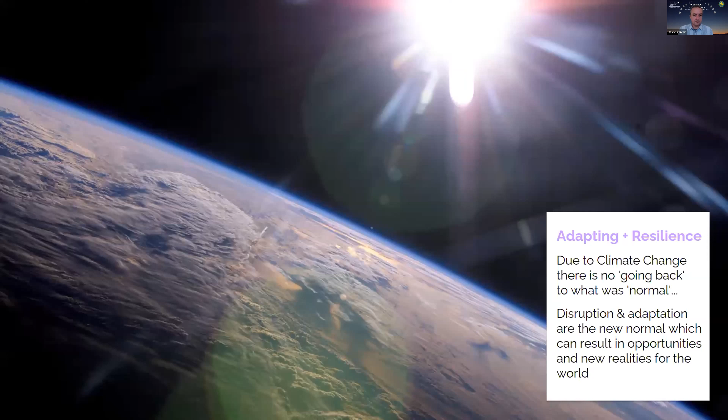So we often use the terms adaptation and resiliency when we're talking about this sort of world we live in now that's faced with a variety of climate crises and global warming. The terms resiliency and adaptability are used to describe that effort of survival that humans are engaged in, as we face an ever increasing number of regularly occurring crises and stresses that in large part have been intensified by climate change and global warming.

When we talk about designing for resilience, the challenge is very much connected to the physical world around us. Where we build our communities is right at that sensitive connection between the built environment, which we create and shape, and the natural environment, which operates at scales much larger and more powerful than we can easily and safely control. It's this tension between the built and natural environment that exposes humans to many of the dangers we face, and unfortunately a lot of them are catastrophic and result in loss of life.

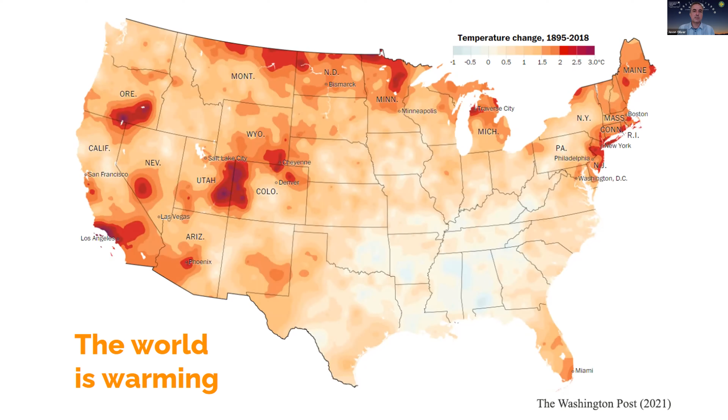This is interesting science telling us the world is warming up. But how does that affect us on a local scale? What do we do about it? One thing we focus on in building design and city design is known as the heat island effect, which in many ways causes these temperature extremes in specific areas.

Global warming directly and physically affects the built environment through the heat island effect, where cities with materials that absorb solar radiation, rather than reflecting it back into the atmosphere as the land ordinarily would, end up concentrating that heat, increasing the temperature of these areas. That's why sometimes in downtown Los Angeles it may be 10, 15, 20 degrees warmer than other parts of the city - a direct result of the heat island effect.

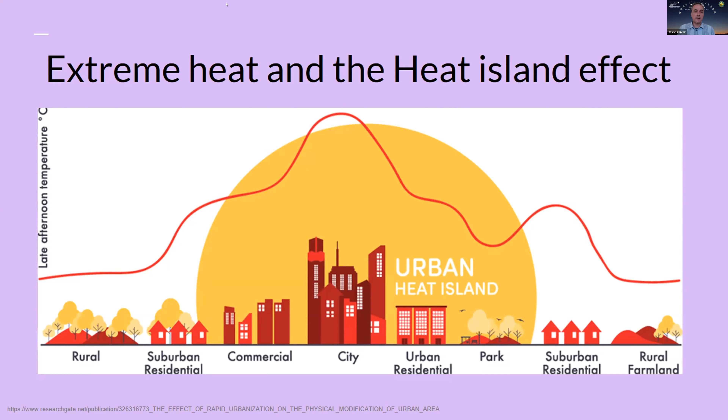The reason that surface gets hot is because as it's being bombarded by solar radiation throughout the day, the black surface, this dense material of asphaltic concrete, absorbs that heat and then re-radiates it out through conduction and convection, rather than the radiation simply bouncing back into space. So that's a really obvious example of the heat island effect on a small scale.

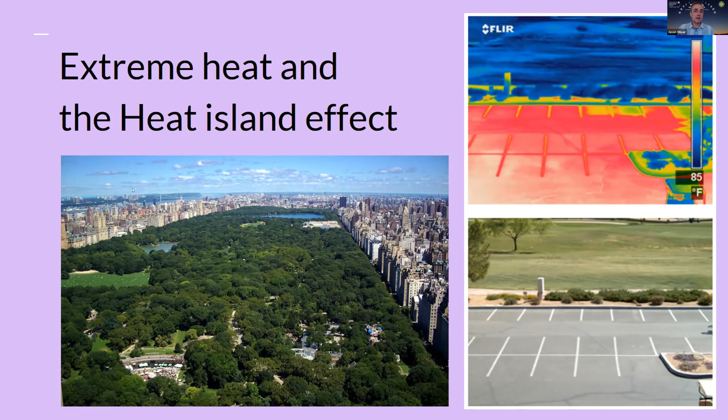So what can we do? Well, we have the ability to plant trees, and that seems pretty obvious, but the idea of urban forestry is a very important, conscious movement taking place in cities to provide more protection from solar radiation. We found that reducing the heat island effect through shading, often provided by trees, provides a whole host of benefits.

So obviously people say, well, why don't we just plant more trees? But it's obviously more complicated than that. We can plant trees, but in order for them to become mature to the level they are in communities like Brentwood and Beverly Hills, that takes many decades. And it takes not only time, but also the people in those communities or the government, the municipal agencies overseeing the design and maintenance of the street and median strips. They've got to water those trees and care for them. That's a long-term commitment that unfortunately some communities have the resources to provide and others don't. We can see that visually when we look at these communities.

Unfortunately, what we often see in a lot of communities—this being an abstract representation of a typical house we might see here in Southern California—you can see the deficiencies when we start talking about things like solar exposure. Many houses have a roof, but that roof really doesn't do a lot to protect the building significantly from solar radiation.

Often we want to stop the solar rays before they even get a chance to hit the house. A lot of these buildings, because of economic reasons or the momentum of the building design industry, tend to look a certain way because that's what people are used to, that's what they want to buy. There's a predictability to a housing developer building tracts of housing like this, but they don't really do much from a sustainable design standpoint. They don't protect the building from summer heat, and they don't do much to combat extreme heat days.

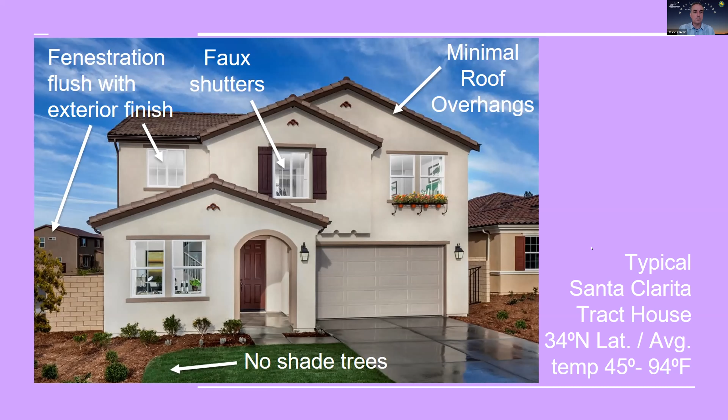So there are a lot of simple architectural things we can do to modify the shell of the building, the envelope of the building, to start increasing the performance of these projects. We could simply plant trees in front of houses, and I think that would go a long way to improving the performance of our buildings.

But obviously we've got to know where the sun's going to be traveling in order to know where to put the trees, not just randomly placing them. We've got to be strategic about where we place them, and make sure we use the right species—either indigenous or native to the area—so they're used to the weather patterns and the access to water, versus other trees that use up a lot of water, which is a critical issue for our climate.

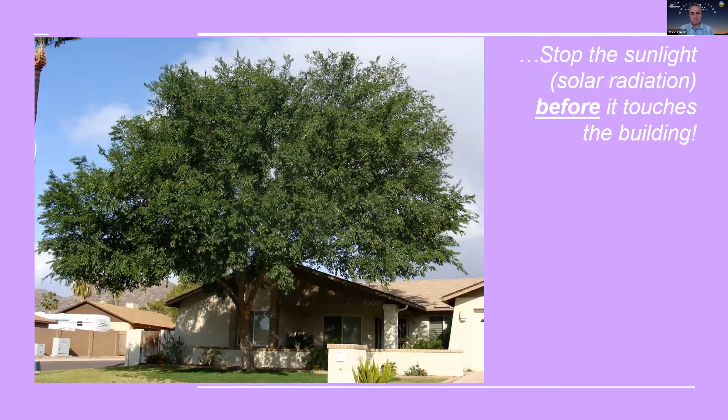One of the areas of the world that I like to look at for inspiration is down in Australia. They have a really aggressive sustainable design program in both residential and commercial buildings.

I also like the fact that this type of architecture creates what we call layered spaces. We often think of our house, or whatever building we live in—maybe an apartment, condo, or single family residence—and then there's a landscape area or yard that's a separate thing. But we're seeing a lot of blurring between those indoor and outdoor spaces.

Again, these spaces can be positioned to take into account the path of the sun, so we can provide more shading for people when they're in those outdoor areas. We can also use these spaces as safe zones for children, where they can spend more time outdoors, maybe outside the house but in a safer environment, providing what we call defensible space that you can monitor.

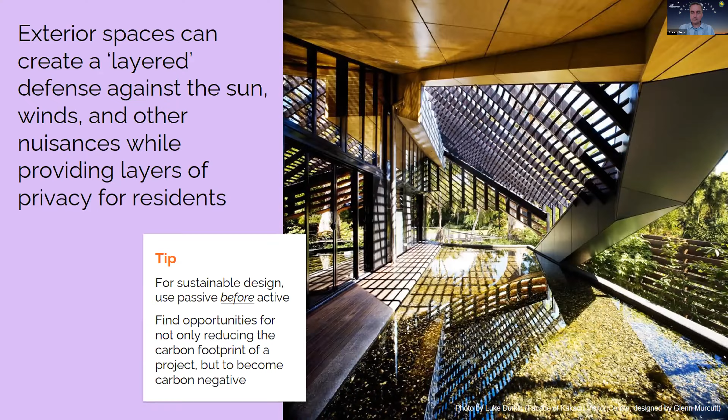Another important topic in sustainable design that affects everybody occupying the inside of the building is biophilia—this connection and balance we have, or should have, between the natural and built environments. We kind of got away from the idea of nature being part of our everyday lives, because it's difficult to control in the way we can control things using artificial air conditioning or sterile environments that don't have plants and animals in them.

But there's a lot that's lost by not having this connection to nature. And so biophilia is the movement to really help reintegrate nature into our daily lives.

I think over the last 18 months or 2 years, particularly as the pandemic's been here, we've begun to realize how vulnerable we've become because we live in these sort of sterile environments. Some of the studies done relative to COVID have found that communities where people were in much closer connection to nature on a regular basis, maybe they were in agricultural communities or whatnot, often had a resiliency that didn't exist for people that lived in more sterile environments.

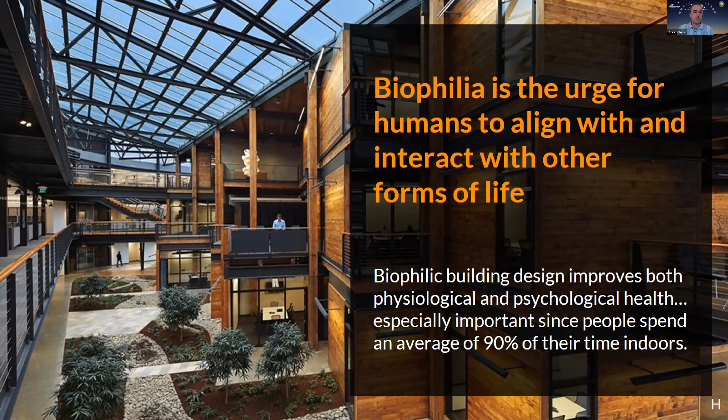Anytime that we can blend together the natural biome, the natural plant and animal life of a community, even if it's in an urban context, that's something that's going to benefit people. And of course, we have to understand what is the animal and plant life that exists in that area, or did exist, or would thrive there, so we can be informed about what types of plants we should incorporate into our architecture and city design.

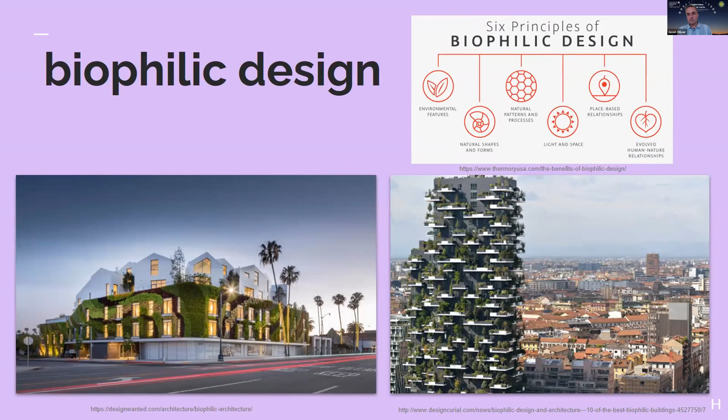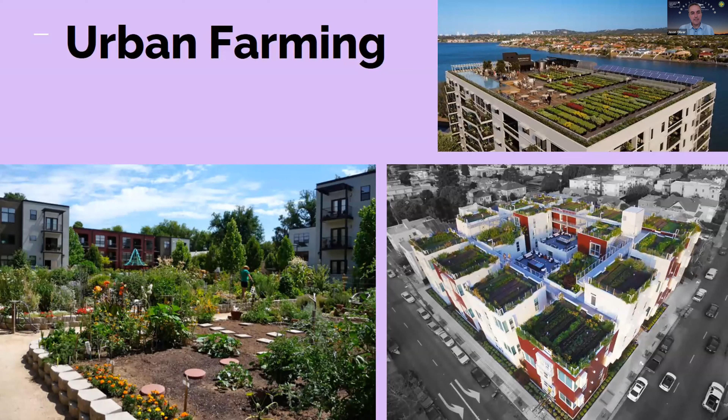Urban farming is another interesting one, and it kind of goes hand in hand with the idea of biophilia. Obviously we plant vegetation for decorative reasons on projects, but what if we can get more out of that vegetation and plant life than just decorative things that suck up water? What if it was urban farming, or the ability for residents of a development to garden?

This provides a whole host of benefits. Number one, it provides a sort of resiliency against food scarcity. Now, you can only plant so much food in a given area, but if people have access to food on their property that they've grown or at least have access to, that's not only a meaningful and substantive connection to the natural world, but it provides a safety blanket in case they're not able to get to the store, or there's a natural disaster like an earthquake or a fire and they can't access food. They would at least have a reserve of food that might hold them over for a day or two.

We kind of saw this during the early parts of the pandemic, where there was a hesitancy for people to even leave their homes, and being able to access food is important. This idea of urban farming also contributes to a connection to the community, a sort of pride of place that people may have about where they live. If they've grown these plants, they've grown this food, they're going to obviously have more invested in it. And it also helps address the heat island effect.

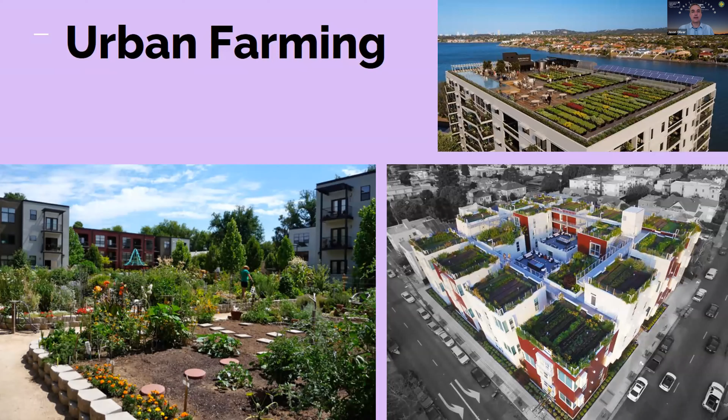The other thing about urban farming and planting native plant species is, irrespective of whether they're edible or not, we've got to make sure that we support pollinators for our communities. We're not the only living organisms in our cities. There's plant life and animal life. Things like bees, butterflies, and birds, and this whole cycle of the environment needs to be accommodated in our cities in order for the various scales of life to exist healthfully. And it all comes back to supporting our resiliency, our ability to survive in the long term.

I actually just read a statistic yesterday that 80% of the world's drinkable water is located down in Antarctica. So that means there's only 20% that's elsewhere. And a lot of that's probably up in the Arctic. And then when you look at the areas where people actually reside, there's not a lot of water available to us.

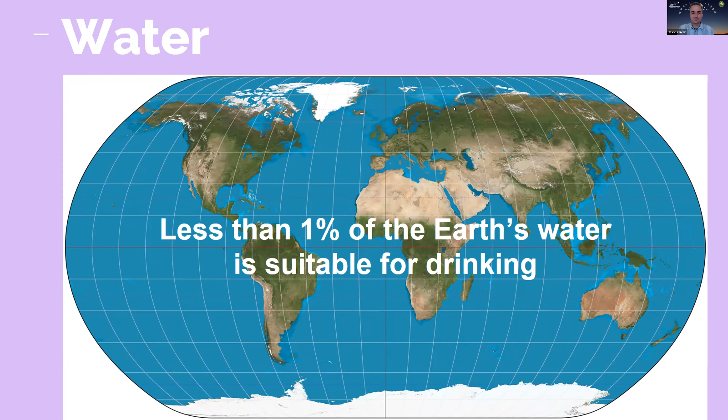So part of water is not just simply having water, but it's got to be drinkable water. It's got to be safe and non-toxic. And so water that's suitable for drinking is called potable water. It's probably one of the most salient luxuries that we enjoy in the United States and in some other parts of the world. Our unquestionable easy access to potable water is something that most people don't really think about until maybe they travel to another part of the world, or they're faced with a natural disaster like an earthquake or a fire, where their ability to access safe drinking water is put in jeopardy. And then you realize how important and critical water is to our very survival. We simply need it every single day and in large volumes of it. And it's not as simple as it seems to be able to acquire that water.

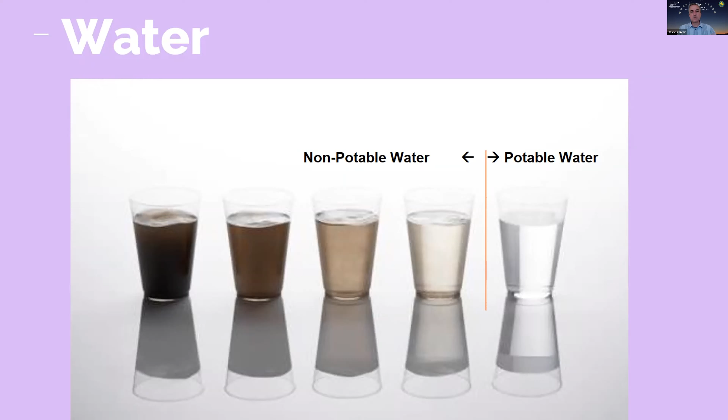Now, a lot of major cities like those we have here in California, Los Angeles, San Francisco, interestingly, we have an abundance of water like we saw on that global map, right near us. We have the Pacific Ocean, just miles away basically. And so there's sort of this inquisitiveness about, well, why don't we take that water and make it potable water. There's a process called desalination that extracts the salt and the brine and other things from water to make it suitable for drinking. But the problem with that is a tremendous amount of energy used in that process.

And then what do you do with these byproducts that come from that? A lot of times they're pumped right back out into the ocean, which negatively impacts the aquatic ecosystems, which then has a sort of downward spiraling effect on the ecology of the area. So it's not as simple as just sort of saying desalinating. It's sort of analogous to the prospects of using nuclear energy generation. Back in the 1950s, it seemed wonderful. We could get limitless amounts of energy, but it didn't really look beyond the immediate benefits. It didn't look at what do we do with this radioactive material that is going to take many thousands of centuries before it's no longer dangerous.

And sort of the same thing with desalination. So instead of turning towards desalination as a sort of magical remedy for our chronic overuse of water resources and the dangerous water shortages that we face, and we don't always know that we face them, but they're there, we need to learn more and emulate some of the water reuse strategies that other societies have done over the centuries, and the way other societies are managing their limited water resources. That's something where I looked at Australia, and they're extremely aggressive on water reclamation. After they've used water, how do they capture it and then reuse it time and time again?

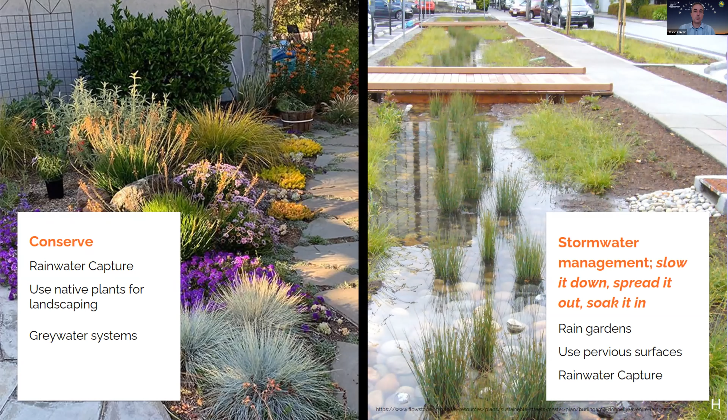When we take considerations like natural ventilation and cooling and lighting a building into mind, these are the fundamental characteristics that we as architects and interior designers can use to reduce the environmental impact of a building.

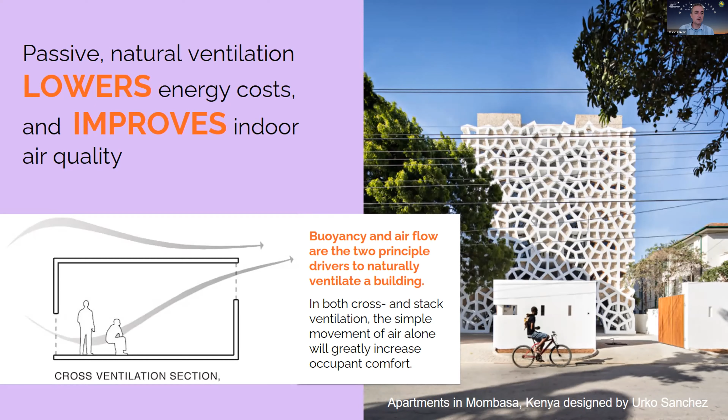As part of naturally ventilating a building—which seems really obvious, since a lot of us live in homes or apartments where you can just open windows—when done right, it can often cool the building down as well. It also provides access to natural light, and our connection to nature goes in a lot of different ways, one of them being circadian rhythms. Our body needs to know when it's daytime and when it's nighttime, and our overall well-being is tied to that rhythm of the daily path of the sun.

The other interesting thing from studies on naturally ventilated buildings is that the psychrometrics of the occupants—in other words, the measure of people's comfort—is actually much broader if the building has access to fresh outdoor air and the people can control that ventilation, opening or closing windows or adjusting vents. People are willing and comfortable in a much broader range of temperatures, so we don't have to have artificial air conditioning and can still provide a comfortable and nice environment for people.

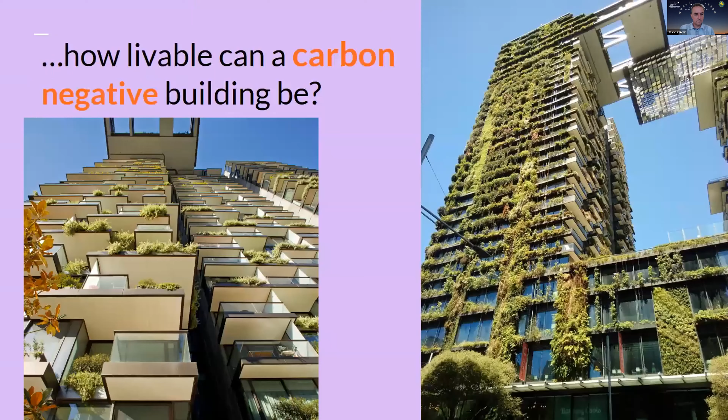So this is an interesting project, again, an interesting one in Australia. I go there a lot for examples of how we can bring all these different ideas together in sustainable design as designers, and still address all the other issues we have to have for a building, to occupy the spaces that people need, to have a building that stands up and has access to water and all the different considerations of a building. Now we have to think about how we can do this in a way that's carbon neutral or carbon negative, so the building isn't reliant on burning fossil fuels. It's pretty challenging, but there's a lot of tools we can use, some of which we've talked about, to do this.

It involves not just the design of the building individually, but where that building is located in the city. Are they going to have access to public transit, or rely on single-use occupancy vehicles? Where's their water source going to come from? How is the energy generated for this building? Where's that going to come from? Is it generated on site? How much of that energy is going to be conserved? Or is it coming from some utility-scale energy generation facility? Is it a solar farm, a wind farm, or a coal-fired power plant? So all these different scales of considerations go into the carbon footprint of a project.

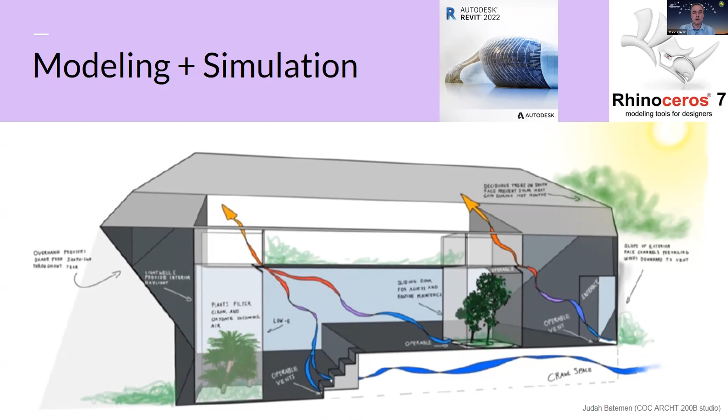So we talked a little bit about the United Nations goals. Another metric we use in sustainable design is called the quadruple bottom line, and it's the blending or balancing of these different seemingly opposite forces. The obvious ones are we've got to take care of the environment or the planet, otherwise it won't be suitable for life. We've got to take care of people, the social issues, that we've got to support each other, and then there's of course economic issues or profitability - not in the sense of maybe Elon Musk, one person having a certain percentage of the entire world's wealth, but that all of us become profitable and have a certain safety that comes from that.

And then also this fourth characteristic is purpose, that there's a sort of spirituality, whether it's religious or some other form, that we have strong cultural and aesthetic ties, and that our lives have purpose while accomplishing these other goals for our survival. So I think this quadruple bottom line is more than just a standard that we judge decisions by, but it's kind of a right.

When we look at the youth and the elderly in the world, when we're striving to improve the world, we need to keep them in mind as part of this. In order for there to be more youth equity in the world, the considerations of the built environment we've looked at, whether by architects, interior designers, city planners, developers, government officials, anyone that helps shape the world around us and how people live, we want to improve the conditions for youth, both locally and around the world.

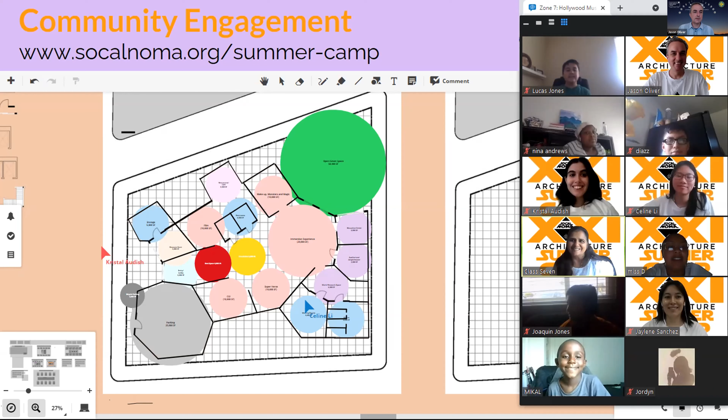On this slide is a summer camp that participated this last summer, where the campers learn about architecture and design. They design a building, and along the way they learn about a lot of the sustainable design concepts we talked about today.

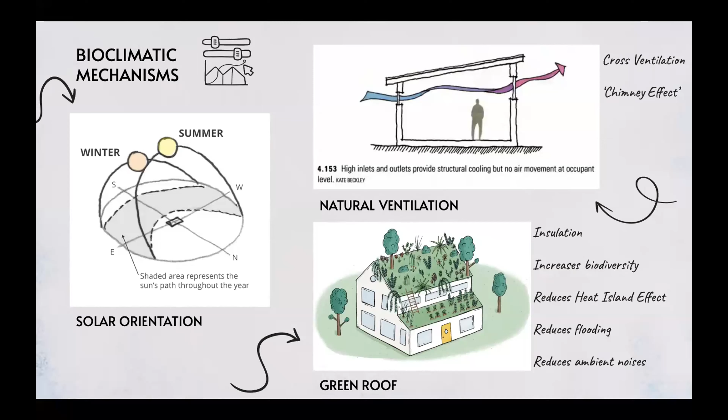As we move forward with the educational project with ITCA, we're taking the Campos Family Bioclimatic House a step further, looking to improve the building design through implementing new mechanisms such as energy efficiency, internal comfort, and the installation of renewable energies. With that, we've been researching the benefits of integrating performance analysis software into the early building design, in particular Sefaira for SketchUp and Autodesk Insight for Revit.

Performance-based design allows designers to understand the building early on and make better design decisions based on real-time feedback. Sefaira implements an iterative process which continually assesses how your building is performing, what is driving that performance, and how you can influence it.

Why is this important? It allows you to quickly test out different design ideas within the 3D building environment. Essentially, you're able to see if moving the window orientation will allow for better ventilation or better daylight.

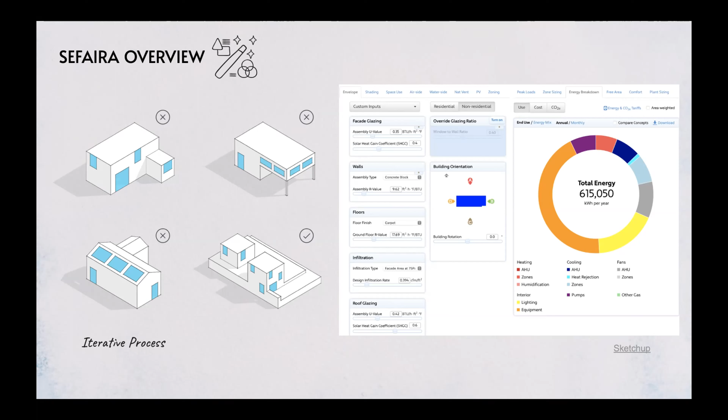Pictured here is the Sefaira extension in SketchUp. For this plugin, we are able to get a snapshot of the energy and daylight performance as the design evolves. We are able to answer questions such as how much energy your project is using per year, which building factors are driving that energy use, and how much daylight your building is receiving.

As for the bioclimatic housing project, we'll be implementing it on a smaller scale, using it for daylight and solar studies, evaluating the optimum building orientation, fenestration, as well as PV panel orientation. I will go ahead and hand it off to Cristian to go over the Insight.

So Cristian, I don't know if your microphone's plugged in. Oh, there you go. Can you hear me? Perfect. Sorry about that, let me start over.

Thank you for going over it, Viridiana, I appreciate it. So now I'll go over Autodesk Insight. Essentially what I found out about Insight is that it's separated into 3 different aspects: solar analysis, lighting analysis, and energy analysis.

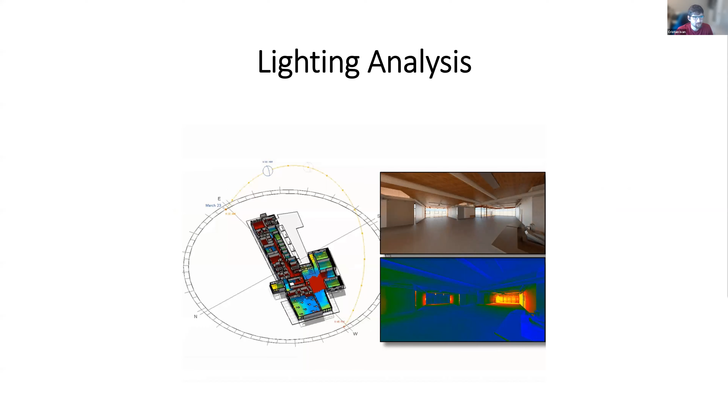So let's start by explaining lighting analysis. I'll just go over the aspects of each one. Essentially, luminance is the intensity of light reflected off objects in a scene and reaching your eye.

The accuracy of these results is wholly dependent on the materials used in the scene being analyzed. For example, the materials used in the glazing of a window, the reflectivity from it, or if used in walls or even the floor, will affect this analysis. So that's something you need to account for when you're building the model in Revit.

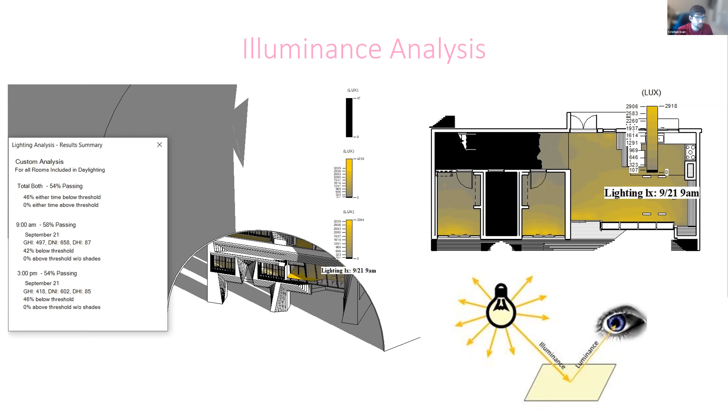The daylight factor is used to assess the internal natural lighting levels as perceived on working planes or surfaces. Essentially, it's the percentage of illuminance compared to that on an unobstructed horizontal plane, like the one seen in roofs. The information is used to determine if light is sufficient for occupants to carry out normal activities.

Let me go over LEED. This is just a LEED analysis. It essentially determines your design progress towards achieving LEED daylighting criteria, so if your building qualifies for LEED certification. It's a brief overview, not something too specific, but you get a sort of idea of it.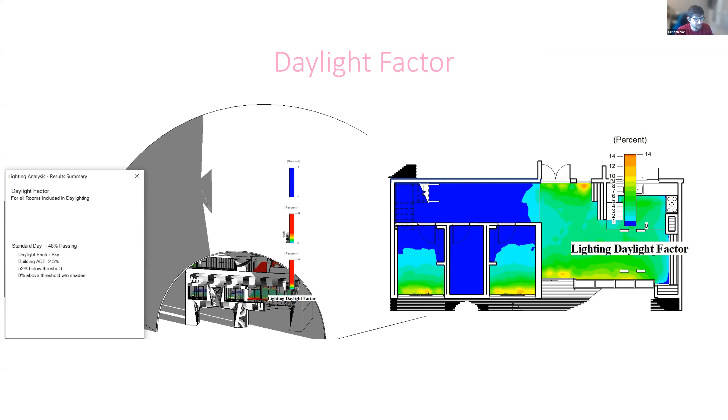You can go more specific and more realistic, and this can actually have an effect in this analysis. You can do shading and other passive solar mechanisms to get a sense of what it actually affects on the building.

Now I'll be focusing on solar analysis. The photovoltaic analysis is essentially an analysis of solar panels. You select the surface the solar panels will be on, and you get information on the energy savings over the year, the amount of kilowatts you would receive, and the years it would take to get a payback. In this case, it would be 9.3 years to get a payback from attributing solar panels to that surface.

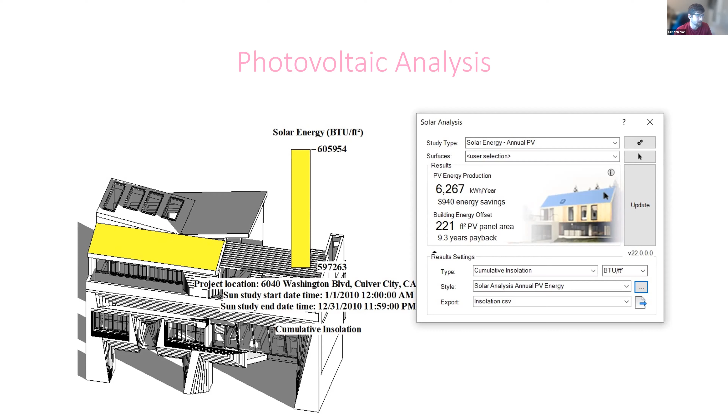The insolation analysis is essentially the amount of solar radiation reaching a given area. For example, I selected the whole building in this case, and you can see the radiation hitting certain surfaces. You can also use passive solar mechanisms like shading and trees to achieve better results. In this case, you can see that red area is getting a lot of energy or solar radiation onto that surface.

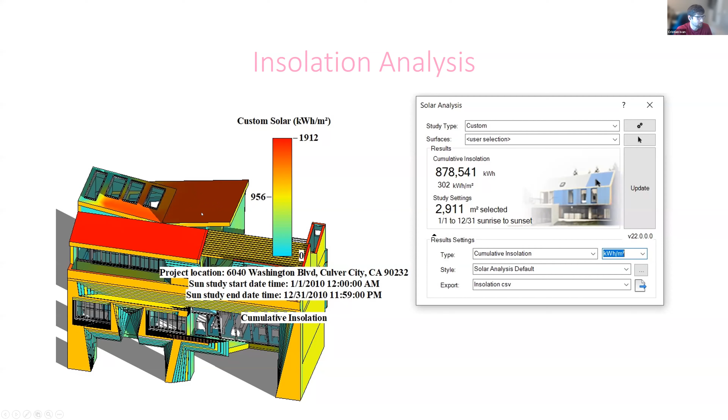So in this case it's good because we're going to put photovoltaics in this part, so it's good that it's receiving so much solar radiation. But in other areas where there wouldn't be any, like here, we could do some sort of green roof where we add plants or something like that to alleviate some of that solar radiation.

Now I'll go over the ITCA El Salvador project Viridiana was talking about. This is separated into two different phases. The first phase starts from November, this month, up until February of 2022.

The first step, which is separated into three parts, involves going over the project with faculty, discussing different aspects we could build on, either aesthetic or a combination of aesthetic with something that actually affects the environment, like making it LEED compliant and incorporating passive solar mechanisms.

For step 2, ITCA and COC faculty would conduct a report and presentation at both institutions, summarizing the project progress and results thus far. That would be due in February of 2022.

Lastly, we will be going into an international competition called the Solar Decathlon. It's a competition separated into 10 contests, entering categories of either design or build challenge. We will be participating with 79 other schools in the architecture contest with the design challenge.